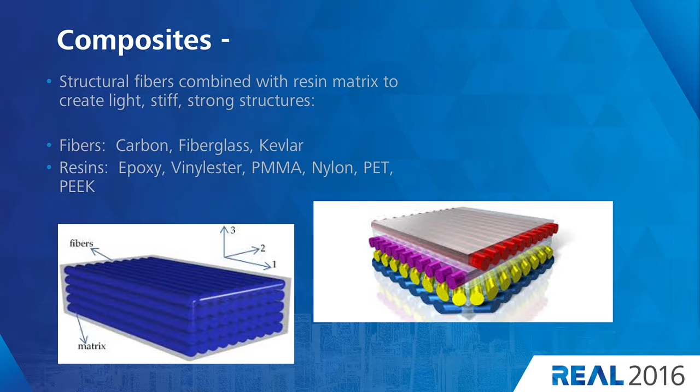So a little bit about composites for people that maybe don't know what they are. Carbon fiber, Kevlar, fiberglass are things that are commonly seen. Started out in 787, F-16 aircraft. It's come downstream into bicycle wheels and baseball bats. So we've got long, stiff fibers that you can see in the left-hand slide. So the blue fibers are very strong and very stiff. The loads are transferred through the fibers through a matrix or through a resin system. And because the fibers are only strong in the direction of their length, we stack these materials up to be able to tailor the engineered properties.

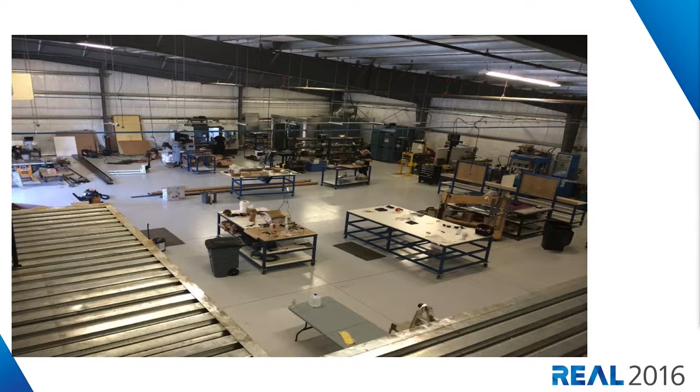A shot of our shop space. It's basically an empty shell that we moved in a couple months ago, so it's been lots of work and not much sleep. So this is kind of what we're working on at the moment. About 30% of our business is sports and rec. We do baseball bats, lacrosse shafts, bicycle rims, bike components, balance board decks, rifle stocks. Do some unmanned aircraft parts and prosthetics and orthotics, which we're going to go through as a worked example. So these are all really different products, and we don't focus much on the product. We are process people. So most of the time our clients know what they want. It's our goal to be able to deliver what they've sketched out.

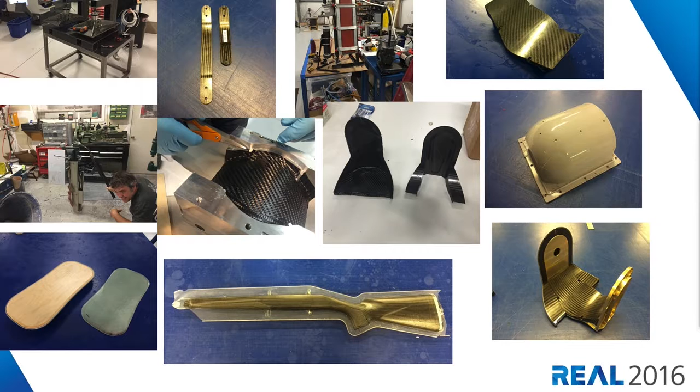So a couple of random shots of some of the things that we're working on at the moment. In addition to the products, most of what we do are the things that people don't see. So we design the factories and the equipment and the tools and the machinery a lot of times that's required to be able to make these components. Lots and lots of time spent on the computer. Everything starts sometimes with a 3D model, sometimes literally a pencil sketch. Lots of analytics involved to be able to get to the point where we're confident enough where we can cut a tool and go in and build parts.

When we get down to the parts production end of things, lots of chemistry and electronics and thermodynamics. These are liquid materials that a lot of times are changing phase. So they're going from something that's liquid to something that's solid under heat and pressure. We've got PLC-controlled machines that we use. So once we've got a process locked in, it's consistent and accurate.

90% of our business comes from our raw material suppliers, which is cool. So we get a chance to work with a lot of things that are new and next. Most of our clients initially show up looking for finished product. The raw material suppliers are providing the input to be able to make the parts. It's our job to put all the pieces together and actually bring the product to life.

So we're kind of the intersection of theory and reality. We start with the materials on one end, the design on the other, and we've got to put all the pieces together. Currently we use a whole bunch of different types of software. We're really interested in working with Autodesk and Fusion and looking at where the world's going, because it's kind of convoluted and complicated sometimes. We bring in CAD files from probably 8 or 10 different systems.

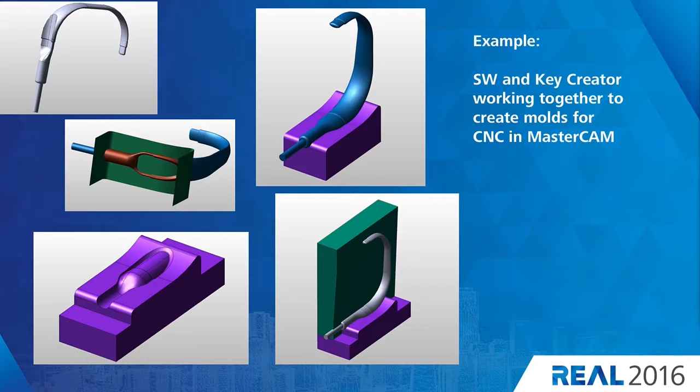So here's an example on a project that we're working on currently. This gives you some idea of what some of the shapes might look like when they're coming in. We've taken this part, and this is how we go through the tool design portion of things. A lot of lofted, kind of convoluted shapes that we end up working with. Michael Sagan will appreciate some of the unusual things that we've worked on in the past.

So software is a big next step for us, just looking at how rapidly things are changing and growing in the software industry. It's been really great for us to come out and see this, and it's definitely going to allow us to spend more time and focus on taking one model from the very beginning of the CAD life all the way through the finished product.

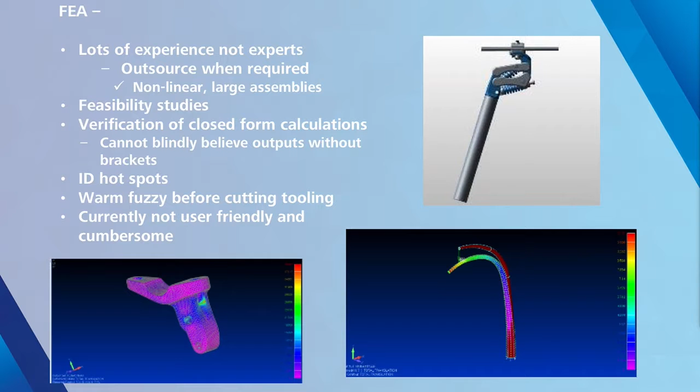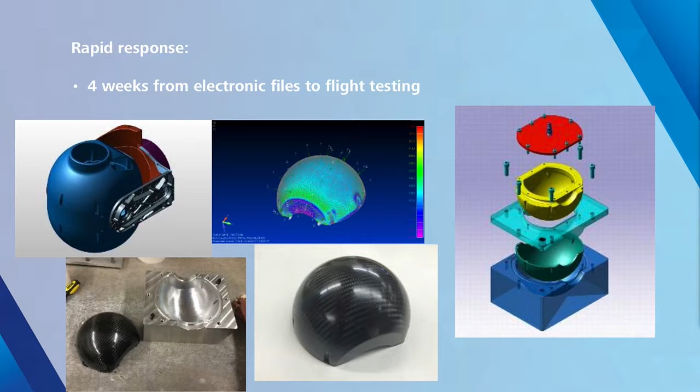Don't need to spend too much time on FEA. So a couple worked examples. This is a camera housing for an unmanned aircraft for a client that's down in Australia. We had an electronic file show up. We did the design work, the FEA work, cut a tool, and the part was actually in flight testing within about four weeks on the other side of the world.

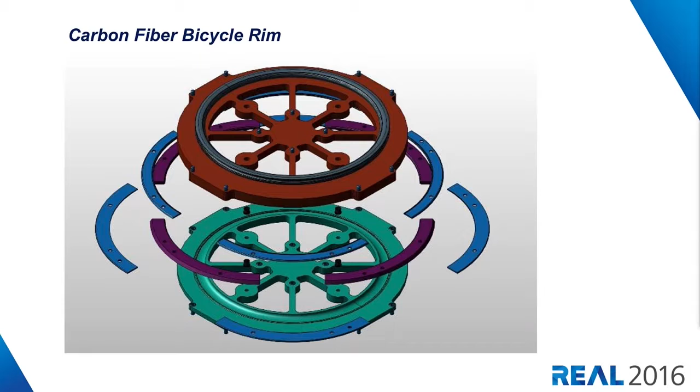This is a process that we're in the middle of licensing to a big baseball bat manufacturer that's interested in bringing manufacturing back to the US. So we've fundamentally changed the approach. This is more of an additive manufacturing process where we're working with 3D robotically braided textiles. And then we're doing a liquid RTM and bladder molding process.

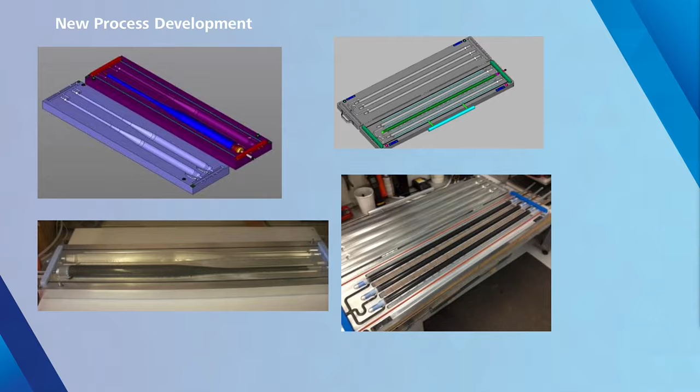Basically, we've met all our goals. This is going into mass production. We'll have finished parts screwed to the floor in the factory next month.

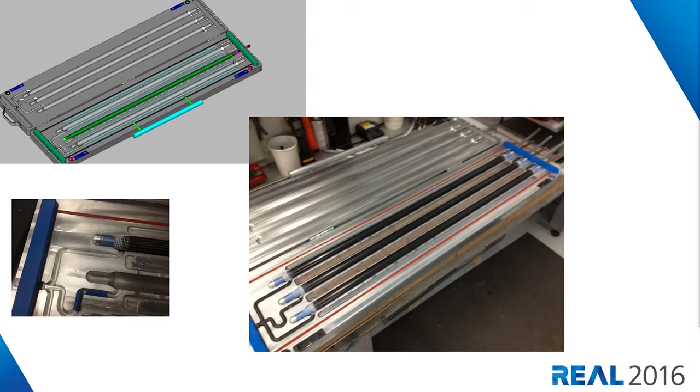Lacrosse shafts, similar process. If you can see on the left-hand side, we're injecting the liquid resin into the parts. At this point, the carbon fiber is dry. The resin moves from left to right in the lower right-hand corner. Once the resin exits the right side of the tool, we use high-pressure air to consolidate the parts. And we do a lot of work with resin chemistry, so how we apply the pressure, when we apply the pressure, takes a lot of experience with resin.

So we're good at keeping people close to us that are good at things that we aren't. Resin chemistry is certainly not our expertise, but we've gotten pretty good at it over the years by partnering up with some guys that know what they're doing.

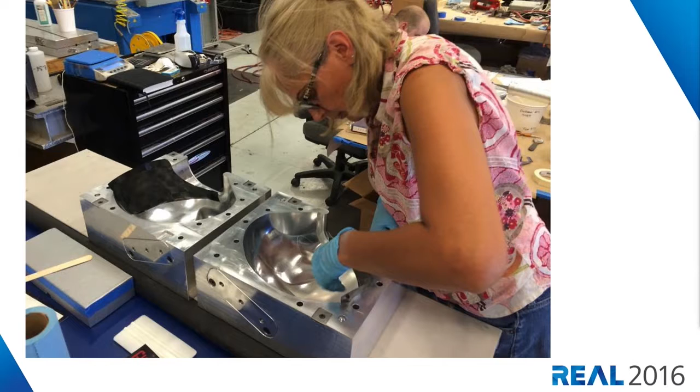So right now, this is still a very manual process. This is a helmet that's being designed. Unfortunately, we're not like Boeing where we can have an automated tape laying system for every single part that we build. So we've got very skilled operators that build a lot of the parts that you're going to look at here in the next few minutes. And a lot of it's very patient and meticulous.

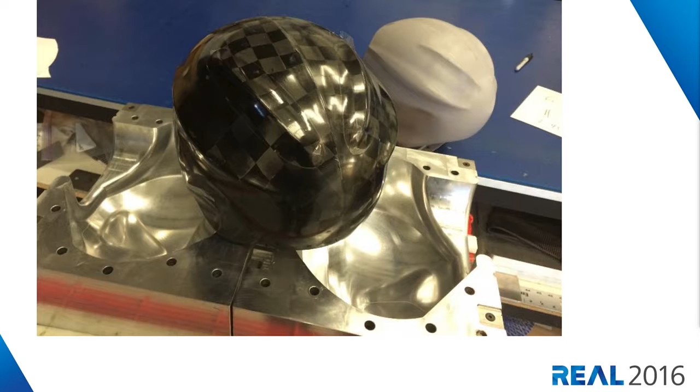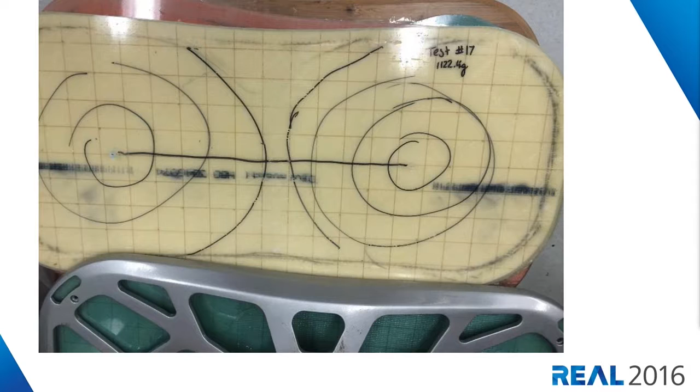This is a downhill ski helmet that we did for a client a couple months ago. This is a balance board deck for a company that's based in Southern California that we're just going through and going to be starting production for them next month. We've gone through and basically started doing a bunch of prototypes. This is something where, to be cost effective, we had to come up with ways to be able to make these parts in a different manner.

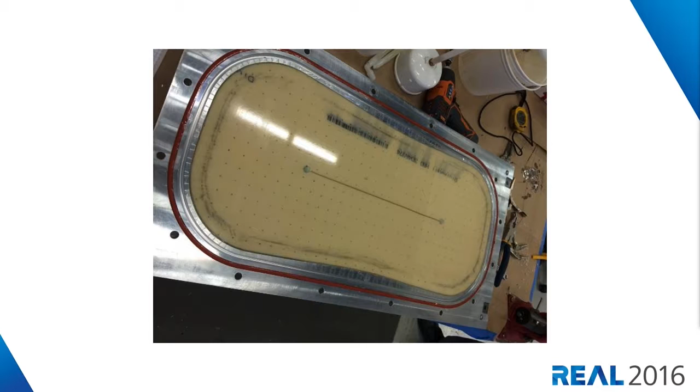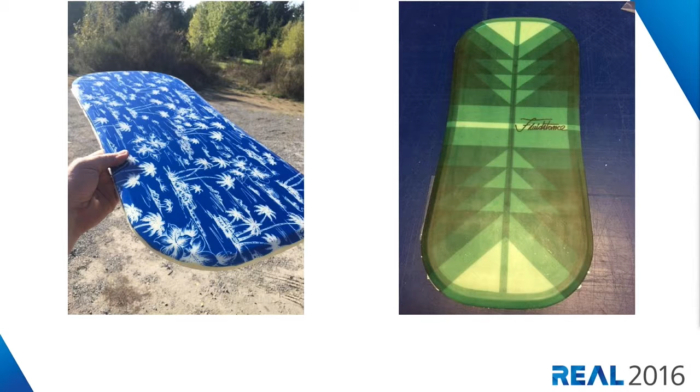This again is resin transfer molded, so this is kind of like a ski or a snowboard. That's what one of the first parts coming out of the mold looks like. And we did a bunch of development work to be able to integrate graphics into the part. So touch labor in the US is very expensive. We don't have the ability to be able to go through and sand and paint and apply graphics to everything.

So we're working with some textiles companies down in Southern California right now. So the part on the right basically comes out of the mold and it's complete. We literally just deflash it, put it in the box, and it's done.

So I want to walk through an example on something that we've developed here recently. This is a dynamic spring system for wounded warriors and for children that have typically drop foot. So if you've got damage to your Achilles, this is an orthotic device that helps.

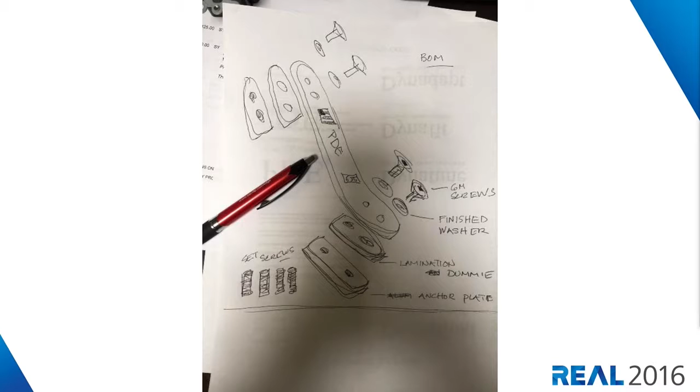So this is how we started. This was the client's input. These are great guys. They're located just down to the south of us. This is what one of the finished CAD renderings looks like on the assembly of the system. We're the guys in the back that are doing all the design and the math. They're the clinical people that are out in the field, and it's a real nice combination. These are the kinds of projects we like to work on.

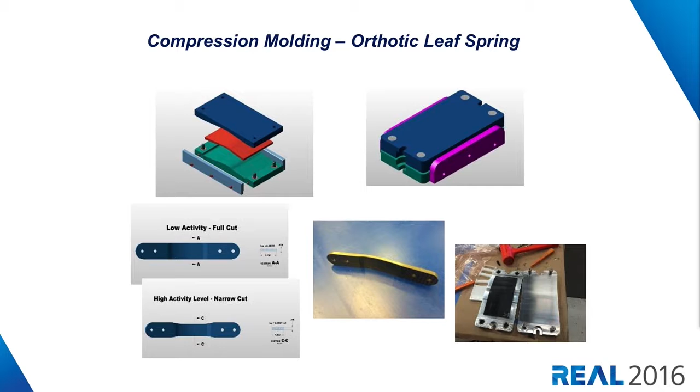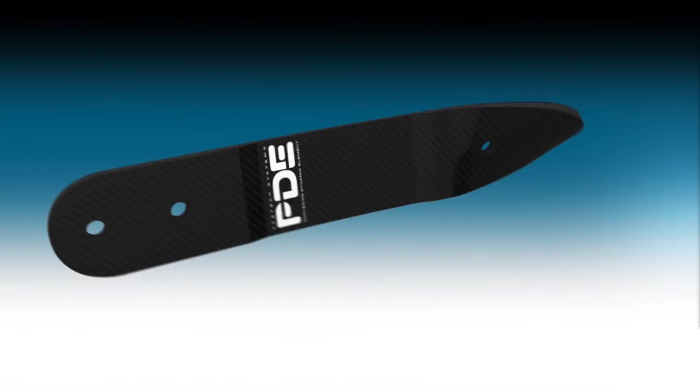So this is all the front end, just some of the initial CAD work to be able to get to the point where we've designed the first parts. And first plaque of the compression molded carbon fiber. First finished part. It's the bracing system, and we've got a couple. So marketing and graphics, I don't have to pay for any of this. This is our clients. They've done a pretty nice job.

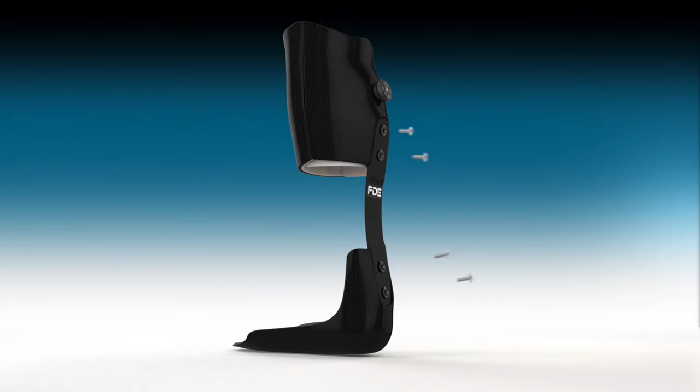So this is the carbon fiber spring, the assembly system. It's modular. They've got different stiffnesses of springs, and then we've got shims that allow them to be able to change the cant of the spring. So you can be a 90-year-old, 90-pound female, or you can be a 300-pound military guy with a big backpack, and same basic system setup.

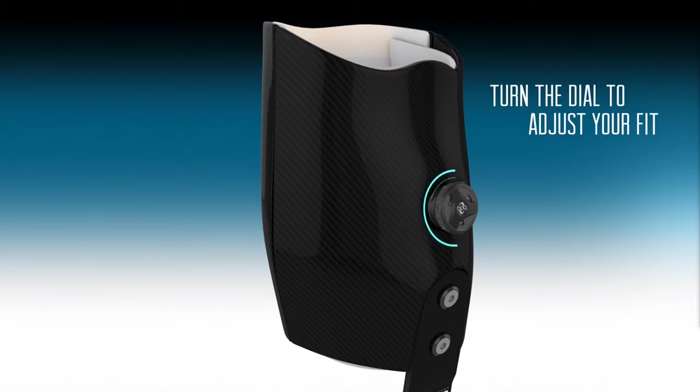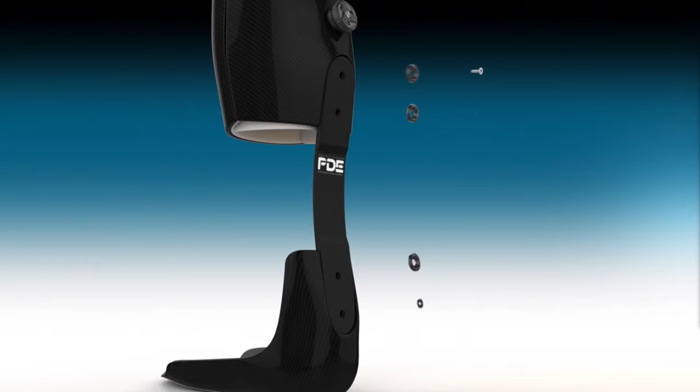The calf and the footbed are cast by the orthotist in the field. So these are a lot of the line laser scanning and digitization that you see. Those are fairly commonly used techniques.

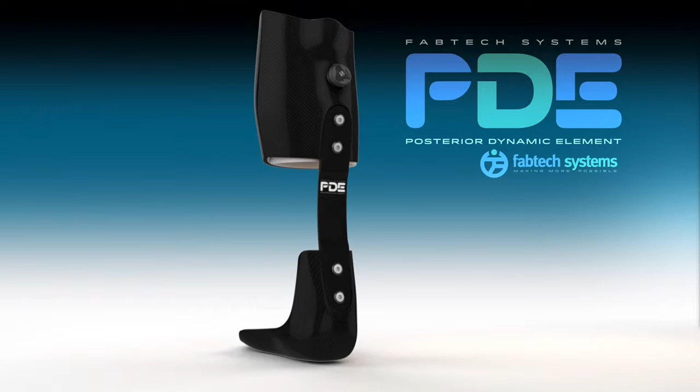And we got just a short clip of a young gentleman that's got cerebral palsy. So you can notice he's got a little bit of an abnormal gait, and his feet don't point quite straight. And that's a bilateral system on him, and it allows him to be able to run around and go out and play like the rest of the kids on the block.

This part right now is in Australia at one of the most advanced gait labs. They're going to have 10,000 frame per second high-speed footage shot here actually this week. So this is just launched and gone into production here.

So where we're moving in the future is looking at more three-dimensional textiles technologies and basically starting with three-dimensional materials and moving to more of an additive type of a process. We've got a couple textiles manufacturers on the East Coast that we're doing some development work with. We've got a couple different applications in both aerospace and sports and rec that we're looking at, as well as an orthotics application.